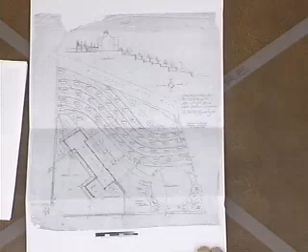So to landmark the house and not include the grounds is hard for me to be convinced of. I was wondering if this plan, and how much of it still remains, or in your study it was never built. Well, if you could help me. In two or three places, I indicated what I thought were the original parts, from the plan.

And on the north side, the front of the house, there's a walkway that parallels the north, right up against the house, right in here. This appears on the original plan that I also included. Yeah, this is it. And there's also a little retaining wall, so this part is original. You'll also notice that this was an entry court that was paved, which now has a lawn over it. So I believe that actually was done.

This wall continues on, that's there. These four trees are there. The current brick paving is fairly new, so that's not original. These steps are there, and there's some steps over at this end and right around here. And this main wall is there intact, except right below the terrace, where in the 1990s an addition was made, a belvedere, and they rebuilt the wall around that. And I have pictures of that.

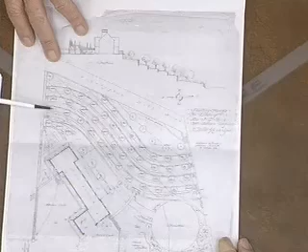As it happens, I accidentally ran across an older picture of the rear of the property, probably taken in about '28 or '29, and it actually shows either 2 or 3 of these terraces with a few young trees. But that was after I'd already submitted the report. None of this is there now, as you can see from my pictures.

So whether it was originally put in and later removed, I don't know. There are just these little pieces that remain. So you don't think the remaining pieces are enough of a remnant to say that parts of the garden are significant? I guess what I was having trouble with was the conclusion that the garden is not significant.

The landscape is not significant, and so that's why I was saying, in your opinion, despite all the additions in the 1990s, would you say that even the changes, and whatever was not implemented, certainly destroy whatever important character-defining features of the garden, or destroy or deviate from the integrity of the design intent?

Yeah, I mean, we're lucky to have this plan. It's fairly clear what his intent was. Yes, Mr. DeForest, we need to leave this here, please.

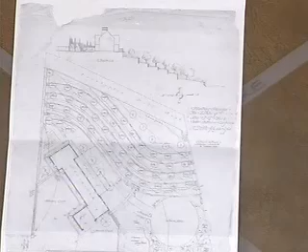Does that help? I would answer it as a politician would: it is not there on the whole, but that doesn't make the fragments less valuable.

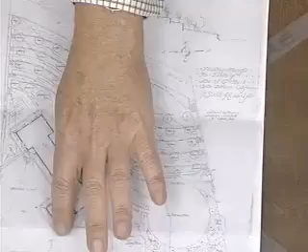My understanding of the proposed plan is that, for the most part, they would leave the intact masonry pieces where they are, and those wonderful 4 olive trees would remain and so forth. The one thing proposed to be removed and reused is the little retaining wall and the pathway in front, and I believe Mr. Becker could explain the reasons for that.

We have seen on one of the older drawings by Mr. Smith that his preference was for a circular drive, and there's also kind of drainage problems with it the way it is. But all that being said, those do appear to be original.

So the question is, are they significant enough, in your opinion, to include designation of the site of the landscape? No. Does that answer your question, Commissioner Murray? Yes. Okay, Commissioner Drury?

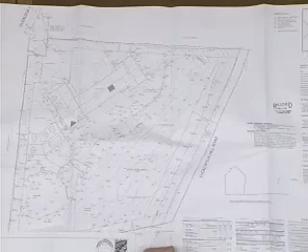Go ahead. So we are addressing some of the real problems of getting into the site first. Right now there is no way to come into the site without having to back up as a guest, so we want to do a version of George Washington Smith's original thought of having a circular driveway, which will allow guests to come in head first and go out head first, and also use vegetation to kind of disguise the new garage that was built in the 90s. It's not too bad, but we want people not to be looking in that direction quite so much as they are right now.

The previous owners built this garage and did a fairly nice job of blending it in with the original house. They left the original garage doorways along here, and we need to reconfigure this garage. It's never really been reconfigured into more usable space, and we would like to remove the vestiges of those garage doors in order to make a building that I think George Washington Smith would say, if he came back today, 'I've got a garage here, I don't need that here.' I want it to look more like what's going on here.

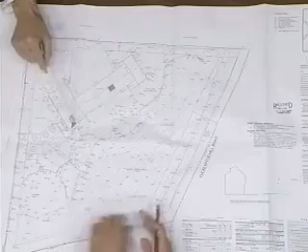Well, times have changed. Right, so we figured the sociology is such that we could afford to mix the use, and then... call it the help.

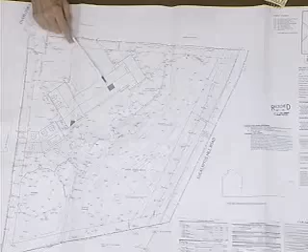And then here on the opposite side, we would like to put a little tiny flat dormer that will bring light into a master closet area, and a couple of windows that go into the master bathroom. And then here we'd like to turn a casement window into a French door so that this potentially wonderful garden on the side could be useful to go directly out to.

Do you want to show us some elevations of those changes? Yes. I don't think we are interested in the floor plan too much, unless there's something with that garage that you need to explain. No, I don't think so.

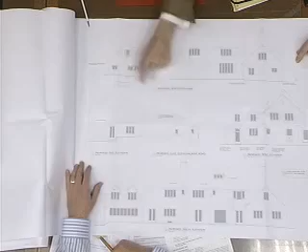And then on the side, there are existing windows that are longer—I think the people in the 90s put them in, and they're just the wrong proportion. So we would like to use a version of this existing setup here and put it right there. Okay, so that's the front.

That's on the east side, so there's just a regular 3-foot by 4-foot casement window that we would like to replace with French doors that match the original French doors.

And then over here is where the garage, there used to be 2 doors of a garage here, and so we'd like to just add these in here without having the wood timber of the garage headers. And we've modified this door, but these were added by, we're almost positive, the people in the 90s. So this is not George Washington Smith's work along here anyway.

That pretty much wraps it up, I think. I think that's it, yeah.

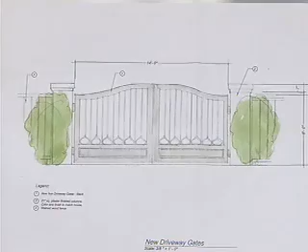Because coming this far into the property really isn't workable, and we need to get from point A to point B, as Mr. Becker alluded to, going back to the original intent of having a circular drive space rather than this asphalt area, and narrowing down the throat between the entry circular motor court and the garage space. This way you stay in this space rather than feeling drawn down the hill immediately to the garage, since because of the location of the front door, you could almost miss it with this kind of spatial tunnel pulling you in. So we're trying to close that off a bit.

Getting back to the original plan, there's also an existing stone retaining wall that runs along here that we want to change slightly and push farther out into the garden. So rather than this elevated hedge that just drops down to the lawn, we can have better layering of plant material in this part of the garden that you see from the house.

And then we come around the corner and clip the wall at the same angle as our little entry court experience by this mature olive. The grade change is already there, so it should not be an issue in terms of the health of the olive. But that allows us, rather than the walk, to be right along the side of the house.

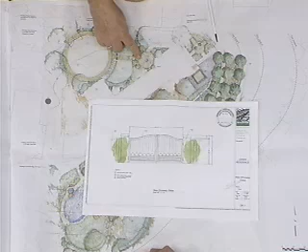And I think if you have any questions about the drainage issues, the architects could probably best explain that. But the idea is to get the grade away from the house while still keeping the intent of the original design of stepping into this small entry court, which we've expanded slightly to add a very small fountain at that point.

All of the stone in the existing little entry court is Arizona flagstone, so we're suggesting to remove that and go back to Santa Barbara sandstone, and all of the Santa Maria stone, of course, salvaging the Santa Maria stone that's on site, which you can't really get anywhere else. Well, we can get really close with some of the stone coming out of the Lompoc area, which I think is pretty similar.

I'm going to stop you right there for a minute, Ms. Erickson, and have you go back to the gate and just describe that real briefly, what the materials are and the heights and such. I know it's all here, but it helps.

Chair, members of the Commission, can I just interject briefly about this gate issue? I was asked to communicate that we would like to get HLC comments on the appropriateness of the location of the gate, and to point out that some photographs were obtained of the location to better illustrate the area.

Just briefly describe what the gate material is and such. At this point, we're really looking at a variety of materials, but it could be all steel, or perhaps wood and steel. It's not decided yet, but that's the direction in terms of the design.

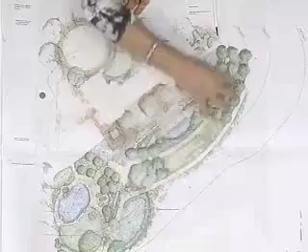So we're going back to two simple terraces with fruit trees, and the olives down at this level are beautiful now. We're keeping this view open to the existing original olives below rather than blocking them. And here is the original little belvedere and arbor that exists, which is a really important piece to keep. There will be some repair needed to that area.

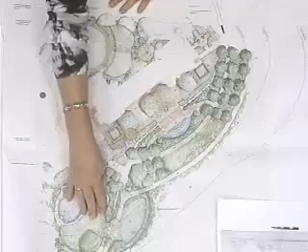With the pool, right now it has stamped concrete around the whole thing, which isn't so great. We really love the idea Mr. DeForest had of a circular lawn area, implied at least in the original plan, down in this area. So we wanted to remove some of that paving, go back to a true stone terrace with new coping, and do a circular lawn off the pool.

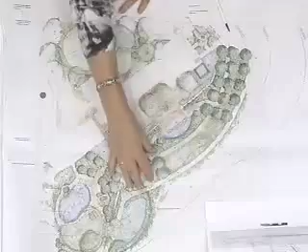This is the only place where the original retaining wall is still remaining. It wanders along, and we break through this area, in the style of the small belvedere that's here, to do some steps through to a lower meadow area that engages you in these lower terraces we're proposing. On the northeast corner, going back in his plan, you can see there was almost like a little knot garden up there.

Going back to a garden that has a strong geometric form. However, that little retaining wall is very close to the house, and if we're adding doors, we would like to remove that wall and be able to walk directly into the garden space itself. I think that sums up our changes.

I'll open up public comment, assuming the applicant is finished. Seeing none, I will close public comment and move on to questions from the Commission.

Commissioner Drury: On page A3.1, the proposed south elevation, I'm looking at that new dormer, and I'm hoping I can read plans properly. On page A2.2, the dormer windows shown above on the proposed second floor plan—is that the same dormer? That's right? Okay, yes, thank you.

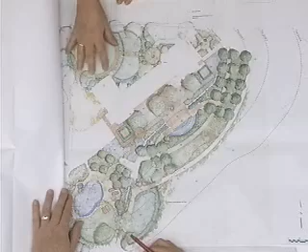Commissioner Arias: Since this is a structure of such importance, and you are in a high fire hazard zone, does your landscaping plan reflect a defense pattern or an ability to defend this structure if there is a fire? I'm not speaking for the architect, but as landscape architects we had a project up on Las Canoas where we put in a very similar motor court, and it was actually used by the fire department to defend that area because they felt it was a safe place for them.

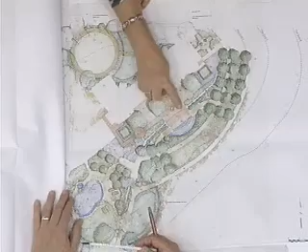An area that is much more accessible than it is now is important for turnaround ability. We do have our fire zones noted here, and that will be incorporated into our final landscape plan.

Is there any possible intention to be able to pump from either the pool or the pond onto the roof area, or in the area, in case of fire? I think as the project develops, that would certainly be a point of discussion, because this house is special and we would like to save it. I think a fire protection plan for the structure, I think it would be... but I'm not the architect.

One thing about the roof is it looks like old shingles, but it's not. It's terracotta shingles. And the owners have found a source where they can repair that, so there's definitely not going to be taking it off. So it is a terracotta roof on there.

I had a couple questions. What is your intent or reason behind having the gate? The reason I'm asking is because we have to respond to Public Works questions and concerns about the location of the gate. So I just wanted to hear a little bit about the intent or the reason why you want the gate there.

If you wouldn't mind, I'd like to defer to the Joneses. That's fine. Yeah, if you could please change chairs with Ms. Erickson. Sure.

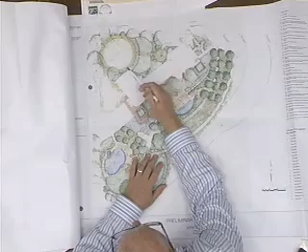Just buy as much space and buffer between the proposed circular drive, because that's an important elevation. Yeah, I think that's a really important point.

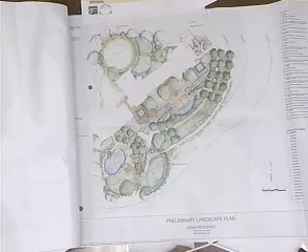Yeah, and with respect to the gate, I particularly don't have a problem with it in its proposed location. It may be difficult to get your encroachment permit. I don't know where you are in that process, but all the best to you, best wishes on that. I guess I would look to more of a wooden look on the gate as opposed to a metal look. I think that's just a little bit more appropriate for this style house. I don't know if my two architectural experts and my historian really feel that way, but I feel pretty strongly that it should be wood. I think that would be more in character.

This has to have environmental assessment, so we cannot take an action on it, and it has to have the Public Works encroachment permit. Mr. Bergman, isn't the environmental assessment the historic structures report we just approved? It's not complete, we just... It's not complete. No. Okay.

So the comments are: restudy the diameter of the circular driveway to allow more landscape space between the edge of the driveway and the structure. Use wood material for...

Commissioner LaVoie? I would disagree. I think if you built this out of wood, it wouldn't last a month. Well, it has a steel superstructure. Yeah, but I think this gate in iron and painted gray would be absolutely elegant. Okay, well then you should have chimed in when I made the comment. So you're striking that comment about the gate being in wood.

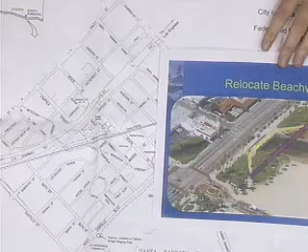So what I am here to discuss today, for the viewers at home, the area we're talking about is Cabrillo Boulevard over Mission Creek, adjacent to Stearns Wharf. We received direction from Planning Commission a couple weeks ago to investigate relocating the existing beachway, that I'm pointing to with my pen here, over to this location.

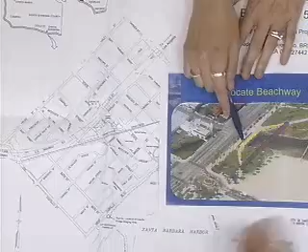It's approximately 45 feet. Excuse me a second, there was a pen. Oh okay, here, this pen works. Yeah, it'll show up, this is a nice pen. So relocating it 45 feet to the south.

Could you give us a very brief background summary? Yes, what's going on in this area, this is actually stemming from a 1998 report to council about the Cabrillo Beachway in its entirety. And this particular section of the Cabrillo Beachway has the highest number of conflict areas of all the Cabrillo Beachway.

And the issue with the conflicts are, as I'm pointing right here, this is where the Land Shark drops off people, the trolley, MTD bus shuttle. So you have a really big flux of pedestrian movement, slower moving. Also, on the weekends, this is all the staging for the art show. Then you have the users of the beachway, the bicyclists, the rollerbladers. What we're experiencing is you want to have the fast moving users, and then there's people that just want to sit and gaze and look out towards the wharf and the ocean, and that's where the conflicts lie.

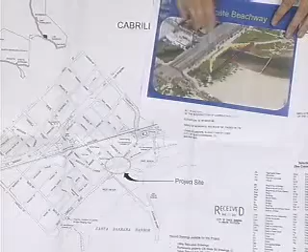One of the recommended solutions from that '98 report was to try to separate the beachway from the sidewalk area. Is it going to solve the problem 100%? No, but it would be a big improvement, and that's what we're investigating today.

Okay, good reason. So in terms of visual, what would that look like if we're relocating the beachway? Again, this is what was approved with the Cabrillo Boulevard Bridge replacement project, replacing a structurally deficient bridge. It was approved back in 2009, and we're gearing up for construction in 2013.

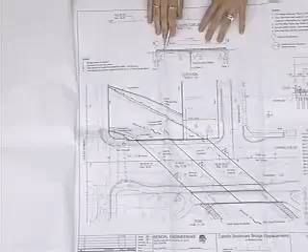So what you have here is the roadway, then the sidewalk, and right adjacent is the beachway. How it looks in section, if you follow along, I have snippets from the approved set of plans, sheet 3, page 71 of 84. The dashed line is the existing bridge, and the proposed darker weight line is what you would see in profile, or in section, looking this way or this way - this would be the proposed bridge.

What's also important when I discuss what we would see from the beachway is what's underneath, what's the substructure look like. I'm not going to go into a lot of detail, but this is the section here. Again, this is the sidewalk on this side, roadway, sidewalk right here, and then the beachway. So what's holding the substructure is you have your precast concrete slabs.

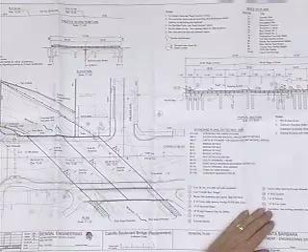Within that, because we're a major street in Santa Barbara, there's a ton of utilities running down the street. So we have to have these voids underneath the bridge, in the vehicular bridge deck, the sidewalk, and our beachway, to accommodate all the utilities. So if we were to relocate this beachway section, push it 45 feet, what would you be looking at if you were standing right here?

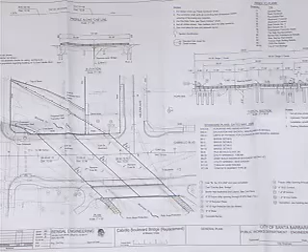Well, looking this way, what you would see is about 3 feet of solid concrete, that would be the substructure, and then on page 4, a 3 foot 9-inch rail on top of that. So we're looking at a 6-foot swath of concrete. This is the rail that was approved with the vehicular bridge, the beachway bridge, and these are open, so it's not a complete 6-foot solid wall. There would be openings there.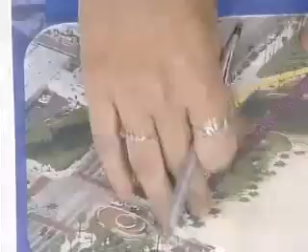So if I was standing on the sidewalk at this location looking, the top of rail from that sidewalk would match the top of rail here. I'd draw an imaginary line, I'd be seeing the top of rail there, and same with the substructure, it would all match. The only thing different about when we move it 45 feet to the south is it's getting a little bit wider there, so the span would get slightly larger.

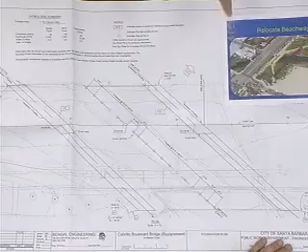The only other thing you would see is, depending again where you're standing, because we have a center support system for the bridge, there would be 4 piers, or piles, columns. You would see those, and they would all be in a row, but at a 45-degree skew. So depending where you're standing, you could either see 4 columns or just 1 column.

So the feedback I would ask is, for the rail, knowing that there's that 3-foot substructure of the beachway, would you go to a lighter rail? Before it would basically match the vehicular bridge rail, and there's a reason for the thickness on the vehicular bridge, because you don't want cars going off to the side. Cars would not be on the beachway. We would have the potential for a maintenance vehicle, like a cherry picker, in the event they needed to get to the utility underneath the bridge, but we're not anticipating any vehicles on there, just pedestrians and bicyclists.

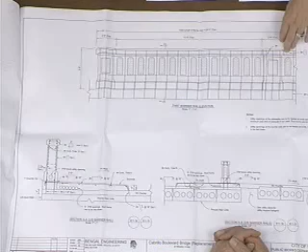So with that, we can maybe go to a thinner type rail, and that's what we really would like your feedback on today.

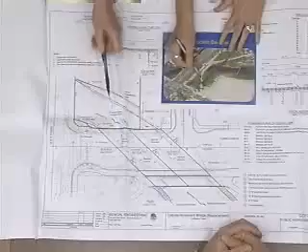Would you remove that concrete from Cabrillo Boulevard to the terminus on both sides of the proposed bridge? Mr. Chair, Commissioner, is the question that we would remove the proposed beachway from this location for clarification? Yes, those two angles in yellow, those would become lawn? Yes, that would be proposed to go back to lawn, so the artists that have their displays would have a larger grass area.

I don't know if that's a good thing, but thank you. Related to that question, but you're keeping the sidewalk. Correct, the sidewalk would remain. What about this portion? That's going away, yes, that would be moved. Okay, so the beachway would go 45 feet to the south, because if we kept these legs, we'd still be introducing conflicts here. I forgot that there was an actual sidewalk here. But there is a physical sidewalk. Okay, that answers the question.

Okay, Commissioner Boucher, any questions? Okay, Commissioner Lavoie, any questions?

Yes, Mr. Chair. Down at the other end of the beach, the other side of the bathhouse, there's another creek area, Sycamore Creek I believe it is, where the bike path goes over the water, over the creek. Yes. That's a wood bridge, isn't it? I would have to confirm that. You mean the wood railing, or is the sitting member of the railing wood?

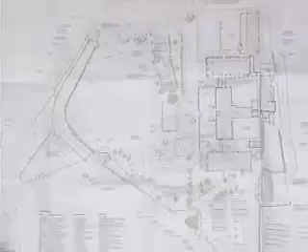Yes, but in essence, if we could turn to page 2, this is the site layout. You've looked at the site as it relates to each of the buildings, and you've looked at the site once overall as related to utilities and things. As things have progressed, some of the construction fencing the owner would like to have become permanent fencing. There is still some temporary construction fencing on site, and there has been, because of the school use, need for some security fencing and also some safety fencing.

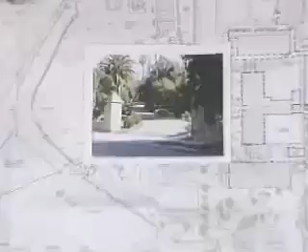So the best way is probably to walk through the site. One of the concerns that existed was, what was the change to the entryway? This was the entryway in 2005. This is the entryway today. Very, very similar. There has been landscaping changes on the other side of the road, which belongs to the Mission. That may have caused some confusion to people looking at it. They changed and added Bird of Paradise to sort of mirror what was on the other side. Now, the fencing along here, this area, is a 4-foot fence.

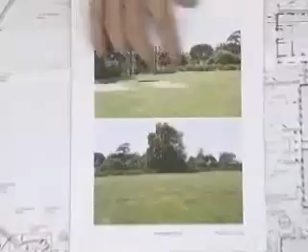There is additional fencing along here. This is an 8-foot security fencing, and it goes along the perimeter. From the exterior of the property, because these are such large bushes, you do not see this fence from the exterior at this point.

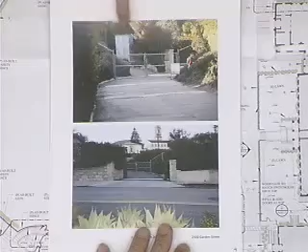I will admit and acknowledge you do see the security fence at this point, and that is kind of as it exists. This is an electrical box that is still providing temporary power to these portables, and it will go away when they go away. And they will go away.

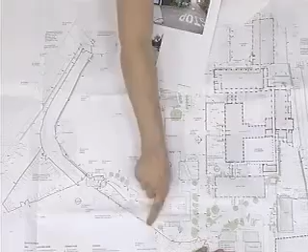There is additional fencing. This fencing here, existing fencing here, it's been replaced and again comes around. Again, it's an 8-foot fence. It blends in very well with most of the landscaping, hides most of that fence. And this is the area back up in here.

And this is a private driveway that is shared between the mission and the school, and it always has had a trash location here, and it's always had some fencing back here. So this fencing is new. Again, it's providing a perimeter security fencing.

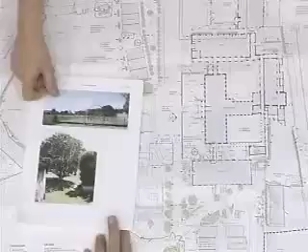This play area was fenced in to provide a secure play area, and that tree was added as a little bit of shading for that area. So these are just more copies of those photos.

And if I'm going too quickly, I'm trying to do what you asked me to do, which was go quickly. No, I said brief. Brief. Say quickly. I said brief. Brief. Well, we're going. All right. All right, I'll continue. Take a deep breath.

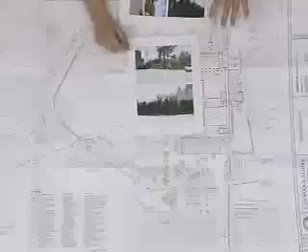In the rear here, the fencing along the back, the green fencing on these plans is temporary construction fencing, and it still is. There has been, for a long time they were using box trees, and they've ended up planting many of them because they weren't doing well in the boxes, but there's still just a temporary screen to the area.

So this is looking here. You can see where we've got, again, just screening, some in planters, some planted. This is looking here at the shop building.

Shop building is still up on stilts, and they've landscaped around it to hide basically the security, the construction fence, the security fence to keep people out of the construction area, because this is in use as a school, and it's used that way every day.

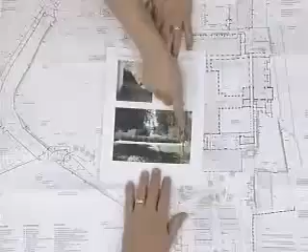The chapel area, again, it's just construction fencing behind. There has been, and this shows that there's, again, still this is construction fencing in this area.

So, let's see. There's, again, this area, we have an approved landscape plan for this area. It has not yet been installed because we do not have occupancy finished and construction done on this building. And so to keep it in a clean and neat method, this also involves some fairly extensive ADA access when they get occupancy of the building.

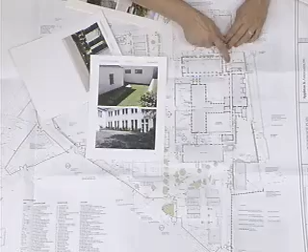So instead of dealing with people walking on grass and the area that had to be torn up to do some of the construction work, pavers have basically—we have flagstone for walking here, and that will be replaced once, again, the project in this whole area is finished. And you can see in some instances there's planters, and in other instances they were installed.

Plants were installed here. All this concrete had to be ripped out to put in the utility trenching, and right now, just for safety and for aesthetics, until it's finished, it's got bark and other things on it. So that's again temporary. The plan is that it would be finished, that the whole site would be finished by March of 2014. We are getting there.

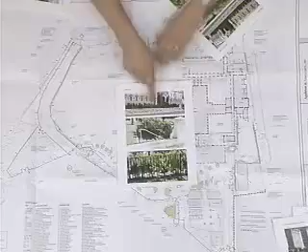Another safety issue that you haven't seen, because the school is being used as a school, and they found that this was an unsafe condition in front of the school building. This is the rock wall here, and they did install a guardrail, and you have detailed drawings of the guardrail there, but there's some photos of how it looks compared to the existing handrails, and then how it blends in, because it blends in behind the landscaping there.

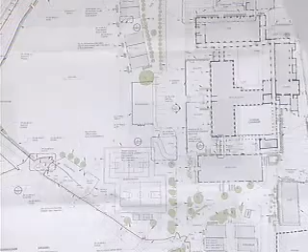Because of the temporary construction conditions, they've installed another temporary water closet for some of the bathrooms and other facilities. It's on wheels and screened away, placed here so kids out on the field can have access to a bathroom. This is what it looks like from the long view of the lawn.

It's screened in and has access ramps. Separate from that, there are two sinks and water fountains, so the kids out on the play field have access to the facilities, and they are again screened from the lawn area.

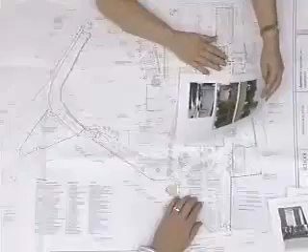You do not see them. They're back behind that planter. So those are there—the sinks and the lawns.

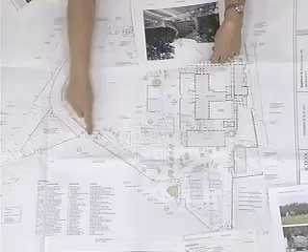The other issue was a safety one. This was a grass ramp that came up here, and it was getting slippery and steep. Ultimately this is part of the ADA path of travel that will come up and cut through here, so for safety they installed this, and again, it's removable for the historians if needed.

And a railing, and then another railing. These cheek walls were already here—yes, those were already there.

All they did was install the treads and risers. Then there's a little gravel path leading up here, which will eventually be part of the path of travel, keeping people off the driveway.

The other major thing done on the site is they cut out some of this asphalt to create a new planting bed, which the fire department has approved. You'll see this is an access area, and they have their access and turnarounds here.

This area—these aren't the greatest drawings. There's a little more elevation detail on the next page if you want to look at that, but we can look at the photos first.

A full-size tree was planted there.

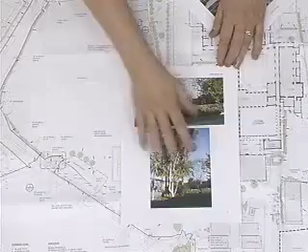There is also some signage, and we'll be going to the sign committee for approval on that. You can see it here—this is looking at it from the driveway, and this is looking at it from this direction.

Where'd you get such a funny shaped jacaranda?

The trustee had it. The trustee had it.

And then this is looking down here, as some of this has been infilled as well.

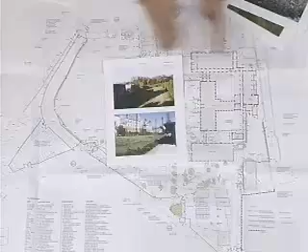I have other photos of some of this landscaping, which was done essentially to create a barrier between the construction area and the school area. Again, it's a planted border. You can see it along here, and from down here looking at the main building.

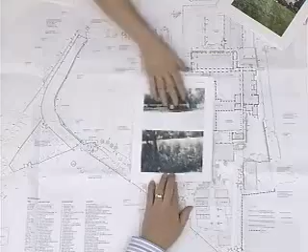This little area was planted, and they asked me to be thorough, so we're showing you all of the areas. This was again landscaped in. There had always been a sign here—it had been the middle school's sign.

And this leads to the Hoffman property? Yes, that's right. That's this gate right here.

Again, they were trying to differentiate usage areas from areas still under construction. They planted a little row of hedges here and another tree here. It's right there, and then this lawn area—so it's looking at that.

And then this is just really the as-built conditions here. There were some fruit trees here that were designated to move—they've moved over here, and this has been planted in.

There's been another jacaranda planted in some of these areas, so I'm just going to run through that. This shows where the fruit trees were planted, and they've got a little sitting area.

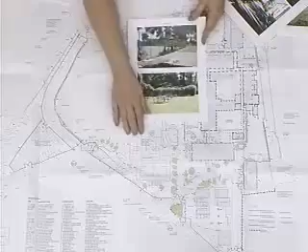This was the landscaping that was approved as part of the portables and the sports court, so you can see how it's filled in, or not. And then again, this is just another view of that front driveway coming in.

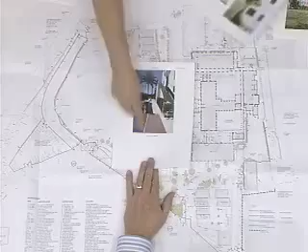This is the ADA ramp that you approved coming in through here, and that's the ADA ramp in front of the refectory building right here.

The refectory building—you had approved this to become an outdoor courtyard outside this classroom. I think you remember that. When they got into construction, and it had a stairway here, they ended up not completing this courtyard, the little outdoor courtyard of that classroom.

So it's just an as-built: here's the door and the stairway, which gave them the exiting they were required to have. And then they've planted some climbing roses on the front of the building. There were vines on the building in the past—I honestly don't know what they were before.

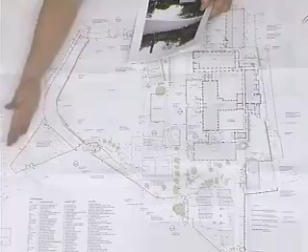So next we have this area, which had been approved as a laydown yard and equipment yard, fenced very close to the road. As things changed and progressed, it started being used as temporary parking, since parking wasn't available here, or here, at different times. So our request is that the fence be moved back, and that this be allowed to be used as school parking during the construction period, ending no later than March of 2014.

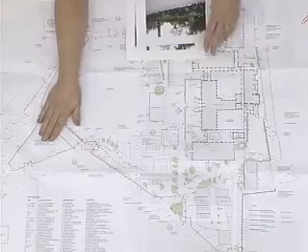It is a gravel driveway and would hold 29 spaces. All of the construction parking is still located over at the Mission, but we're asking that this be allowed to be used for temporary parking until those parking areas can be restored.

It is screened with a green fence. These are photos of the interior of the lot, again showing the green fence. These were taken this morning. You do see the fence from the road, but you don't see much of it from the road.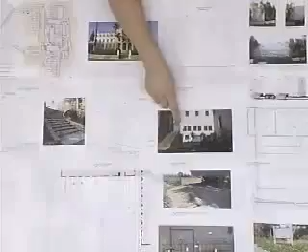Again, the walkway details, the water closet, the landscaping, the planter area, and all the plants. This little infill area was also added, just for security. This is the refectory and the main building.

Sounds like you're done. That's what's happened and what we'd like to do.

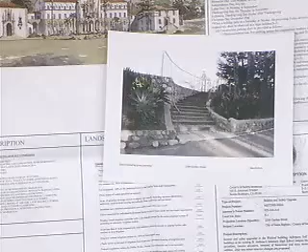That's very contemporary. He's referring to the stairs replacing the grass pathway. Yeah, the new stairs, and I gather they want those approved also.

Thank you, Mr. DeForest. Seeing no other public comment, I'll close public comment and bring it back to the Commission for questions, or staff.

Mr. Chair, I just wanted to point out three things that staff would like you to keep in mind as you review this property. The property is very significant, eligible for landmark and probably National Register status. So maybe there should be a statement of the conditions placed on the property with respect to landscape maintenance, stating no alterations shall be made without approval from the Commission. Going forward, we should clarify what's important to review prior to work being done on the grounds.

Secondly, the issue of temporary installations, which have lasted multiple years, and clarification of concerns expressed by the neighborhood about temporary power poles and services that could go away once permanent electrical installations are in place. Some poles placed temporarily near the front of the property raise concern about how long they remain. Finally, there's the issue of clarity on how much work requires compliance since it's temporary with our guidelines. As Mr. DeForest raised, if you place a limit on these items, it's clearly understood that they will go away rather than how long they stay.

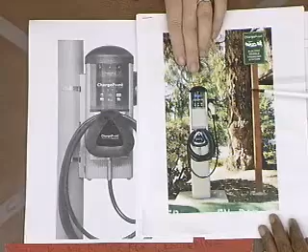We can attach a sign to it. We can't modify the actual station. I'm sure we can attach it, I don't know about attaching it on the front, or know if we can put it on top. Could it be painted on or silk screened or something? I'd have to ask the contractor, I'm afraid.

This is an experiment. No, it is, because at this point, it's an experiment. We don't know how many more of these we're going to get. And then probably if we allow 2 to be installed, and if they're used, we're going to get more of them. If they're not used, they're going to go away. Correct. So I think of that as an experiment.

So if we accept 2 of these, with the simplest installation possible with minimal signage attached to it, and if there's any more coming in the future, knowing that we are going to require that they be painted either dark green or black, proceed at least with this much of it.

Okay, if this is an experiment, then how about we conditionally approve this with a relook or reexamination in whatever 3 years, 5 years, 2 years, I don't care, whatever you pick. But I think it's worthwhile for us, if this is an experiment like you say, which I don't think it is, because if these aren't used, I bet you they are not going away.

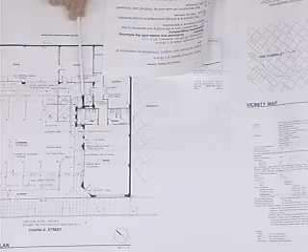In the trash area, I moved the wall that I originally indicated here over to the edge of the building, and you'll see that in the elevations. They have a mailbox here now that's kind of sticking out by itself, and I incorporated that back in here as well as the trash. So I think this area is a little bit cleaner than it was—it isn't quite as broken up.

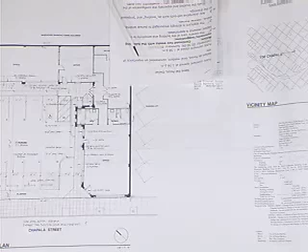Graffiti-minimizing surfaces—I don't know how we're going to minimize those. We have the surfaces that are there; we're not really adding anything. Okay, that's fine.

Stormwater management—I talked to a civil engineer about that and got a detail from him. What we're proposing is a swale along this area with permeable pavers in here. We'll drain the parking lot across, catch it in here. What doesn't go into here will go into there, and then we'll have overflows that go out to the street.

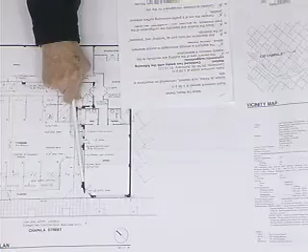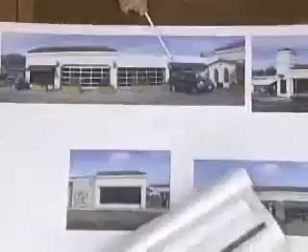The applicant would like to keep the existing light fixtures that we've got along here. We don't have one here, but here, as well as the older one there. Let's look at those in the photographs - I think it shows better here. Yeah, these are the existing ones. We need to add a fixture back in here, I think. I don't believe there's one back in there. Sorry, I just wanted to get those in our memory.

I added a finial to the top of the tower. You'll see that in the elevations. And I came up with a color, or suggested a color, for the overhead doors.

This is the color of the trim, existing wood and the doors. This is approximately the color of the walls that are out there. And then I was thinking of going to maybe almost like a gunmetal color, which would tone it down from the bright aluminum, and then paint that. We'd have to prime them and paint them. But that would be my suggestion for those. I think that's going to go a long way to make those doors sort of recede.

It was suggested maybe that we paint them green, but I almost think it might be too much green.

Then the landscaping should be sensitive to the security of the site. I think Judy or Rhea suggested that we keep it low, and so we've done that. I've done that all the way around in here as well as here and in here. So the only area that's kind of exposed, or could be a potential problem, is back in here, but I tried to keep everything low for that.

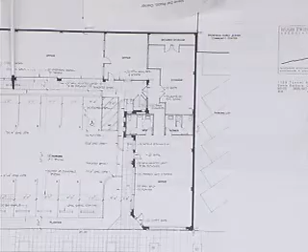And then the vine pockets - I looked at maybe adding them in here, but this is our 4-foot handicap access, and we're right at the limits here for the parking. We have 57.5 feet, and we've got 5 feet here for the planter, so we really don't have any room for anything to encroach. I looked at doing them in here, but this is a bond beam that goes all the way across, and it's integral to the building, so I really didn't want to tear that up. So I didn't add any planters to the building. The other thing was the applicant wasn't real happy about having some kind of vines stuck on the building, partly for maintenance and partly to leave it open.

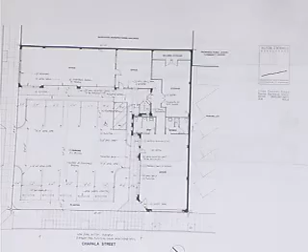On the elevations, the changes were the finial, which we'd have a little capital up here, I guess you'd call it, with a rod with some decoration on that. This is the wall for the trash that I came right off the corner of the building. I went around and looked at a bunch of buildings by Roland Sauter, and he likes these little ogee details - there were only these on the building, so I thought on the wall I'd keep it simple and just do a lengthened one there and bring it out like that.

This is the planting that we've got up against that wall. The bike parking would be here. Again, we've got the doors here, and then this is the trash enclosure with the mailboxes that you would see if you were back in here looking.

Which we never will be. Yeah, or most likely. Never know. You might be right - it might be my office someday. Yeah.

And then this is the landscape plan. I went to the Parks Department, and they want us to put a jacaranda in this existing planter. And we've got an existing planter here with a king palm. They want these on 20-foot centers, so we've got 4 more palm trees that we need to put out there for street trees.

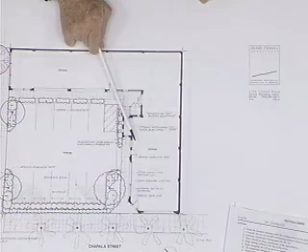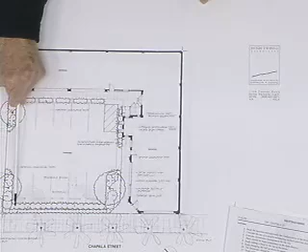Over in here, what I did was a Phormium Maori Chief, which is kind of a darker Maori New Zealand flax - I did those here and here. I've got the dwarf Miriam oleanders, little reds, here. I did dietes below those. And then along here I did Phormium tricolor, and in front of that I did a limas, which is a gray foliage.

The ground cover I called out as gazania, white trailing gazania. I may have another one that I was looking at for that, and that would be in here. And then over in this area, I used dwarf Italian cypress, and then Agapanthus in between, and then a white bougainvillea on the wall.

And then this is the bioswale. I didn't want to get into a lot of grasses and things, so I wanted to keep it simple, make it a little more formal. I thought if I got into a real big variety of grasses, it might look a little too rural. So, I think that's pretty much it.

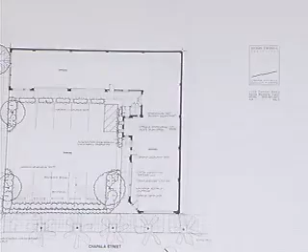Okay, questions from the commission? Commissioner Drury? First of all, let me thank you for these drawings again. They're just beautiful, thank you.

Have you thought of maybe instead of gunmetal gray, like a gunmetal green in that same middle value? I don't know what you mean. Just a little more green in that gray, I think. It's a warm gray, I could go to a cool gray, I guess. Yeah, Mr. Drury, why don't you take it outside? Do that, take it outside.

They just want me out of the room. Yeah, now we're going to talk about you.

I know the Lomandra will do okay in a bioswale situation. I'm not convinced that the Phormium will. They grow in bogs, in New Zealand. You're right, I've actually gone to New Zealand and was surprised to see them growing. That just occurred to me as it was coming out of my mouth. It actually said in the description for this one that they're one of the ones that will take more of that condition than a lot of the other ones. You're right, that's why.

Then the second question I have is, why don't you talk a little bit about what you're doing to the sidewalk to bring it into compliance with the Chapala Street guidelines? It was suggested by Ms. Hands that we go look at the Chapala Street guidelines. They say to use 16-inch square concrete pavers on a diamond pattern. So I talked to the transportation engineer, and they went round and round. Finally they said, go see what Jeff Shelton did across the street. So I went across the street, and Jeff Shelton put in 2x2 colored concrete squares on a grid, not on a diamond.